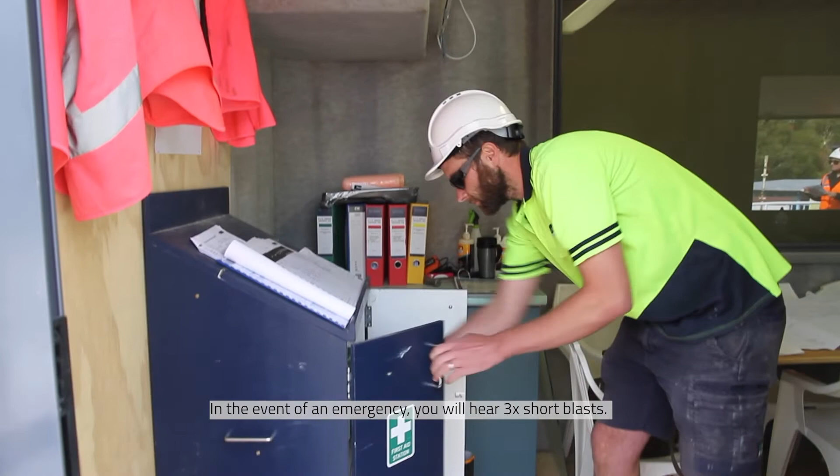In the event of an emergency, you will hear 3 short blasts from an air horn. You must stop what you are doing and make your way to the assembly area. The assembly point is by the playground, in the centre of the pods.

There are multiple safety stations on site, where you will find a first aid kit, fire extinguisher and air horn.

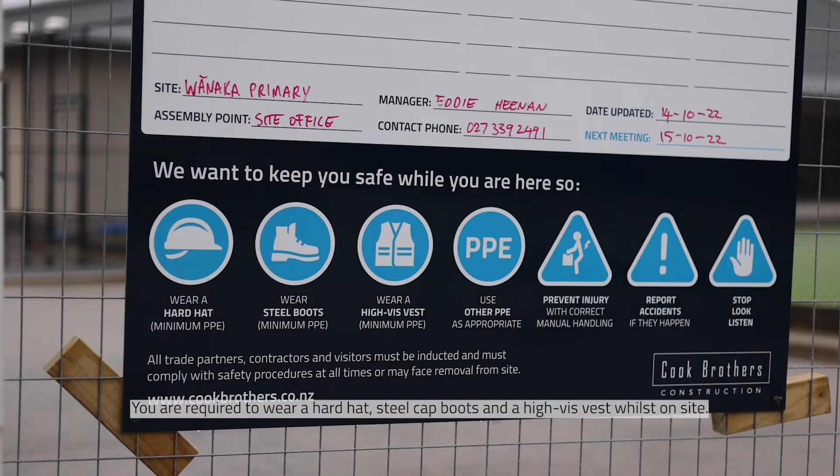You are required to wear a hard hat, steel cap boots and a high-vis vest whilst on site. Please check the hazard board daily for hazards on site. This is a smoke-free site, no smoking on the school grounds.

If you have any further questions, feel free to ask the team on site.

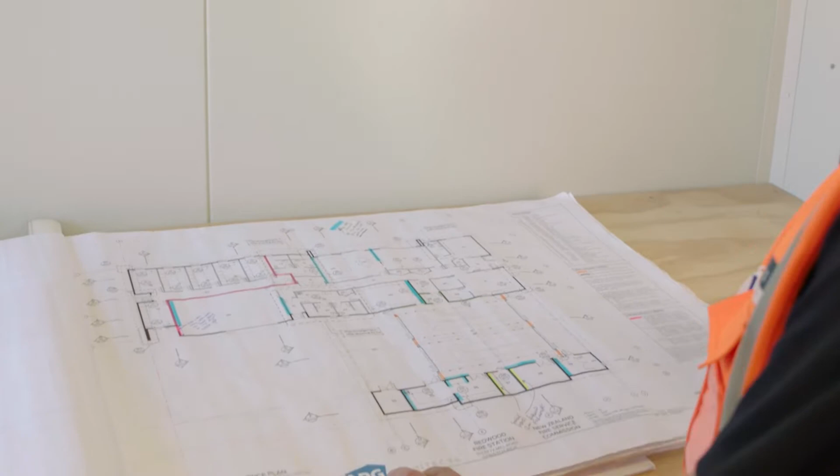Hi, I'm Dave Bulling and I'm the Managing Director of Cook Brothers Construction. Our vision is a team with the desire to take on the world, transform the construction industry and cement us as a national leader. Our culture at Cook Brothers is one of a close-knit team of guys and girls.

We value above and below the line philosophy of ownership, accountability and responsibility, and we leave at the door blame, excuses and denial. We don't have problems, we have opportunities, and we don't have issues, we have challenges.

While you're at Cook Brothers, we want you to be safe, we want you to go home and see your loved ones and do the things that you enjoy during the weekends and after hours. So these are the things that you need to become familiar with, because this is what we live and breathe.

So I want you to have fun, I want you to stay safe, and I really want you to enjoy the projects that we build.

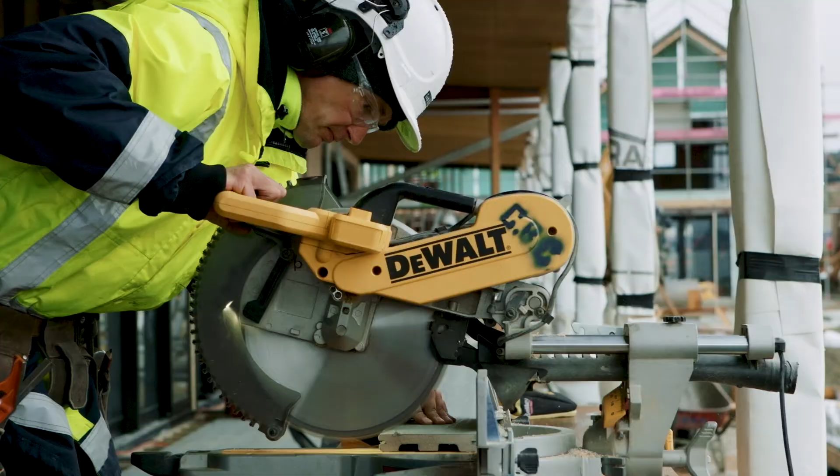Health and safety is about everyone. Cook Brothers Construction encourage team members and trade partners to participate in managing health and safety in the workplace. So in each region, you are supported by a team of health and safety representatives and committees. Their contact information is available in the emergency flip charts.

Some Cook Brothers Construction sites will have an AED defibrillator on site. When one is not located on site, we recommend you download the AED app, which can locate the closest AED location to your work site.

Minimum PPE on site includes hard hats, high-vis shirts and steel cap boots. Singlets are not acceptable PPE on Cook Brothers sites. Additional PPE is task-specific and can include hearing protection, respiratory mask, safety glasses, full face shield, gloves and harness use.

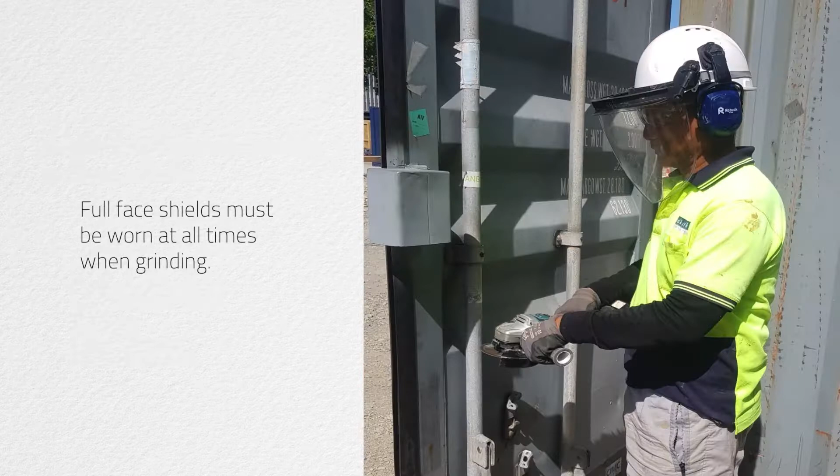Full face shields must be worn at all times when grinding. Cook Brothers are not responsible for the supply of your PPE. Trade partners need to bring their own to site.

All visitors to site must be inducted and wear the provided pink visitors PPE located in the site office. Workers are responsible for wearing PPE appropriately, taking care of the equipment and reporting any defects to your site manager.

All trade partners are required to submit a site-specific safety plan, also known as a SSSP, to Cook Brothers before starting on site. Cook Brothers emphasise that all SSSPs are live documents and must reflect the tasks you are responsible for during the project. Permits are required for hot works.

Please see the Cook Brothers site manager for approval prior to starting.

Notifiable works, as identified by WorkSafe, must be notified at least 24 hours prior to the works commencing and evidence held in the SSSP. All team members coming onto the site must have a site-safe passport or equivalent. Anyone without a site-safe passport must have it completed within 4 weeks of being on site.

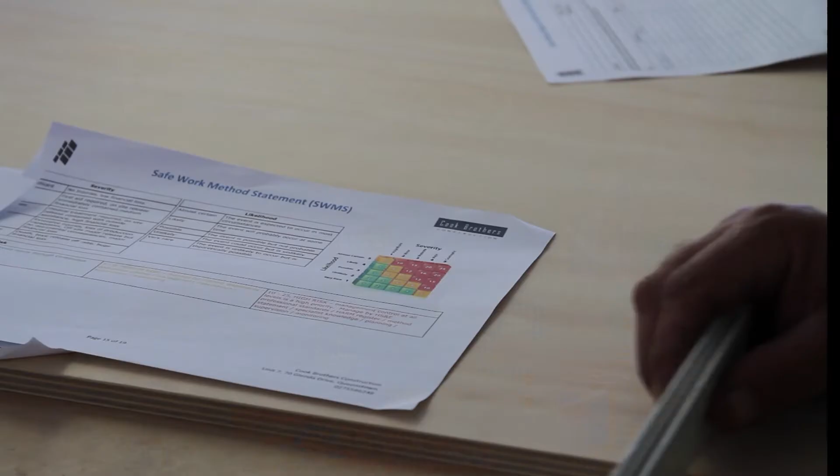Communication and planning is vital for a safe and healthy site. Each worker is required to sign in and out of site each day. The purpose of this tool is not a timekeeping record, but to ensure that all persons are accounted for in the event of an emergency.

Any person not accounted for in an emergency will be treated as missing and may put emergency workers at risk by looking for someone who isn't there.

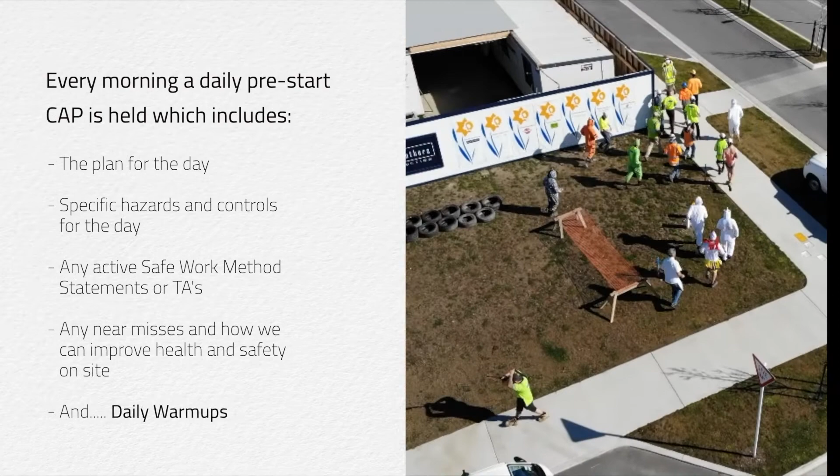Effective planning for critical tasks is essential. This should include a SWMS task-analysis practiced response plan and competency of the team who will be involved. Ensure the planning is conducted with the team members who will be working on or within the vicinity of the task. Weekly toolbox talks are held on site and everyone is required to attend.

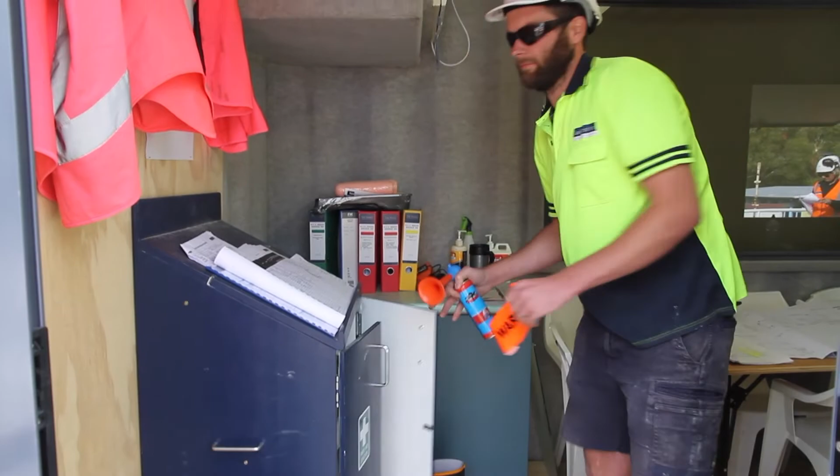In the event of an emergency, all Cook Brothers sites will sound an air horn with 3 sharp blasts to raise the alarm for evacuation.

Your site manager will outline any other emergency alarms specific to your site, as well as the exit routes, the assembly point, first aid stations, fire extinguisher locations, air horn locations, and closest medical centre. An emergency site map will be displayed on site.

Exit routes are required to be kept clear at all times. In the event of an emergency, the site warden can be identified by a red armband. They are responsible for taking the daily sign-in to the assembly point. No workers are to re-enter the site until the all clear is given by the site warden.

In the event of an emergency, check for your own safety first, dial 111, provide assistance if you can, otherwise evacuate the site. Emergency flip cards are located in the site office or the health and safety notice board with this emergency information when needed.

No foul language or inappropriate behaviour will be tolerated on any Cook Brothers sites. Cook Brothers promote a drug and alcohol-free site and have a policy in place. Random drug and alcohol screening does occur on Cook Brothers sites.

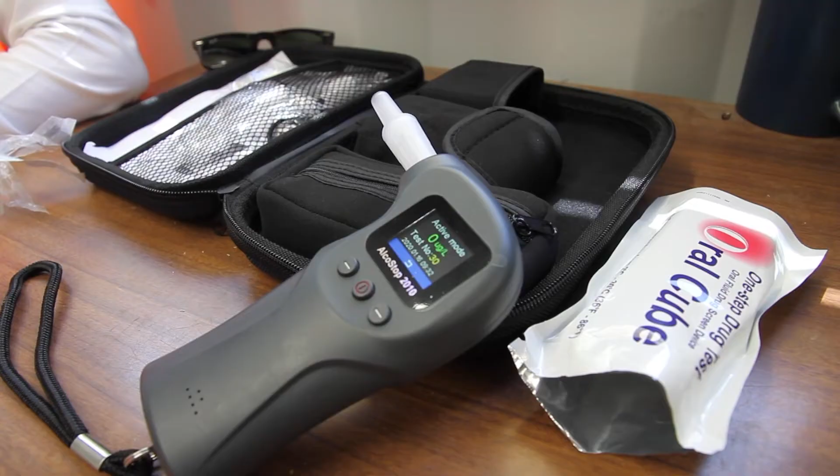If just cause indicates that you may be under the influence of drugs or alcohol, we will ask you to undertake a drug and alcohol test, or we may remove you from site until you can prove otherwise. In the event of a lost time injury, a drug and alcohol swab will be taken for testing.

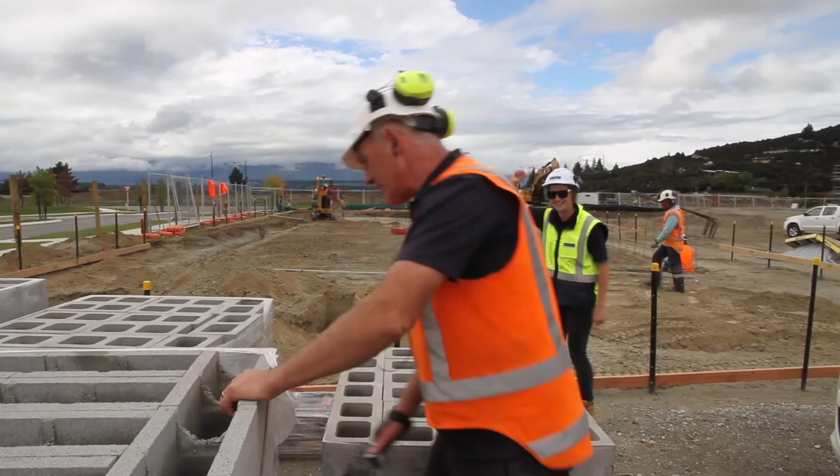The use of audio devices with earpieces is not permitted on Cook Brothers sites. These devices are distractions and create hazards by causing a lack of attention to your surroundings. Radios may be used with the approval of the site manager, but volume must be kept to an acceptable level.

If you are in breach of any health and safety practices on site, a yellow card, red card disciplinary process will be implemented. This can include removal from site.

A clean and tidy site is a safe site. Good housekeeping is required at all times on site, including lunchrooms and wash facilities. All CBC sites are smoke-free. Your site manager will indicate a designated smoking area. Animals are not allowed on site.

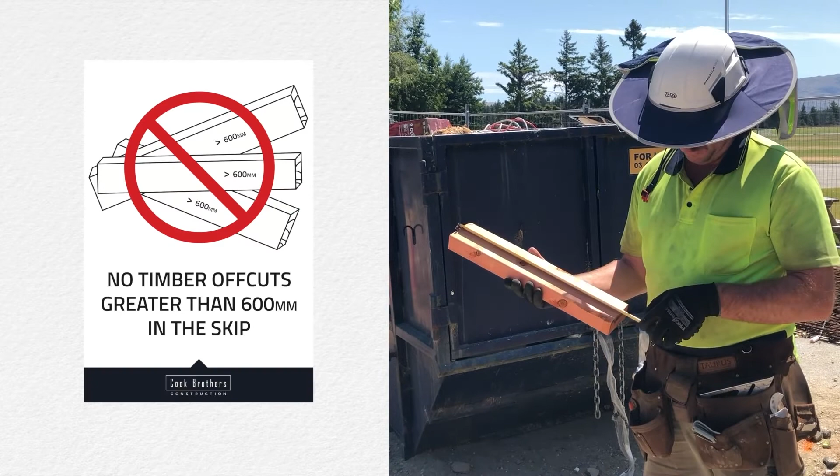All waste and disposal must be covered at all times and disposed of in the correct skips. Our sustainability commitments for waste and material diversion include no timber offcuts greater than 600 to be thrown into the skip. All team members are responsible for reducing waste on site with the use of reusable items instead of disposable.

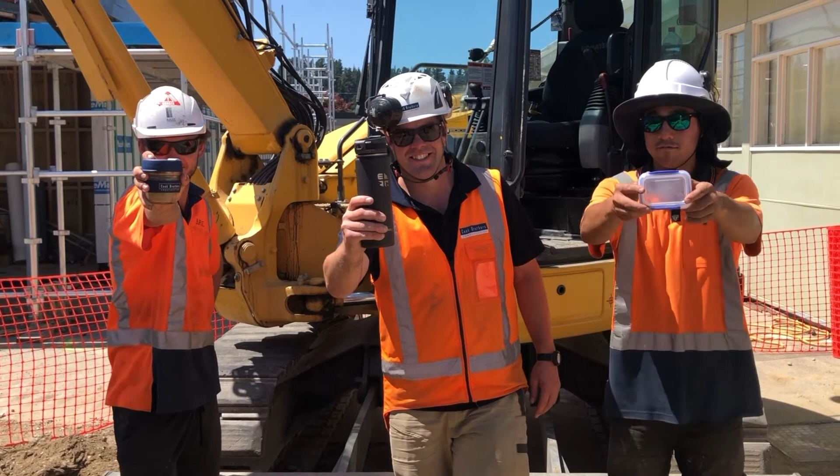This includes keep cups instead of disposable cups, reusable water bottles instead of plastic bottles, and containers instead of food wrappings. Potable water and sunscreen is available on all sites.

Manual handling injuries are a huge contributor to lost time at work. These include back injuries, muscle strain and sprains, and hand and foot injuries.

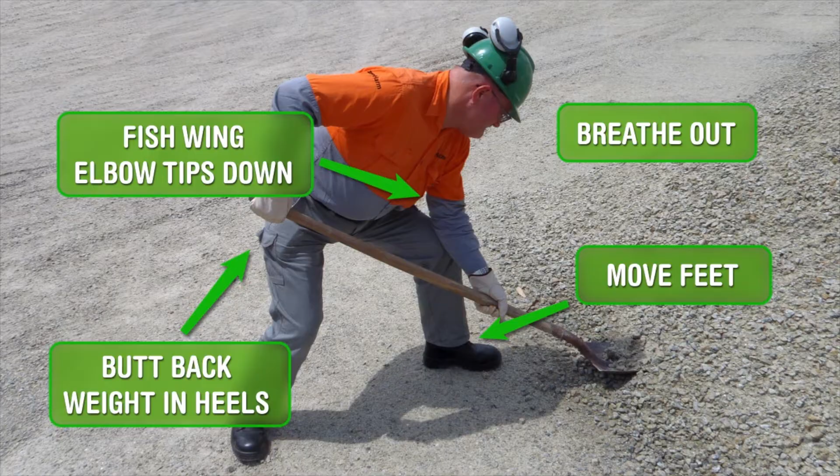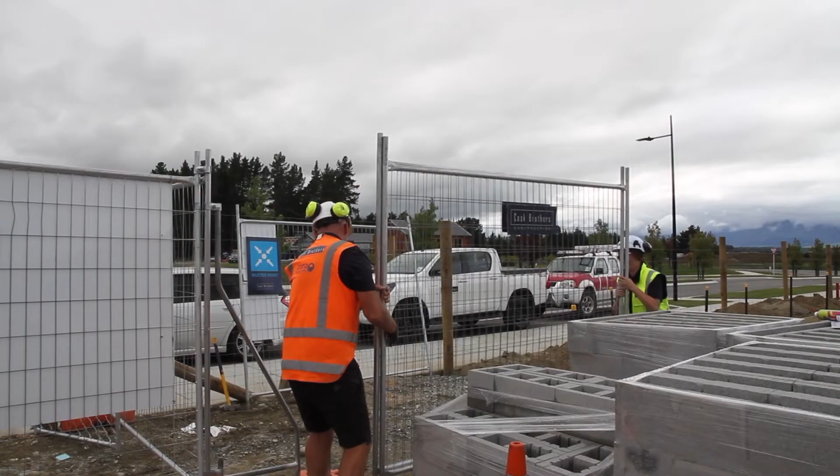Any materials weighing more than 20 kilos must not be lifted by one worker. No worker should attempt to lift any object that they are not comfortable with. When mechanical lifting devices are available on site, these should be used for manual handling tasks. Team lifting must always be conducted for heavy loads that cannot be lifted with mechanical devices.

You must manage the risks caused by hazardous substances in the workplace. Any hazardous substances brought to site must be stored and disposed of correctly. All hazardous substances must be recorded in your SSSP and have a supporting safety data sheet.

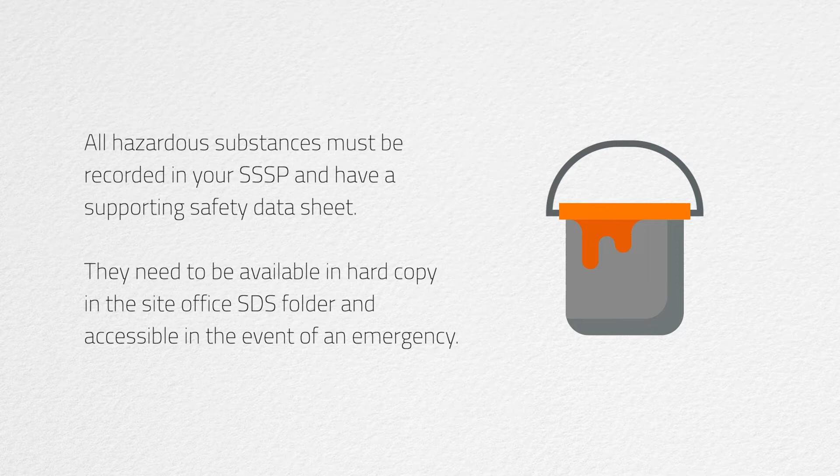They need to be available in hard copy in the site office SDS folder and accessible in the event of an emergency. Under no circumstances shall liquid wastes, such as paints or solvents, be allowed to soak into the ground or be poured down drains. This is hazardous waste and should be disposed of correctly. Spill kits are available on site in the event of a spillage.

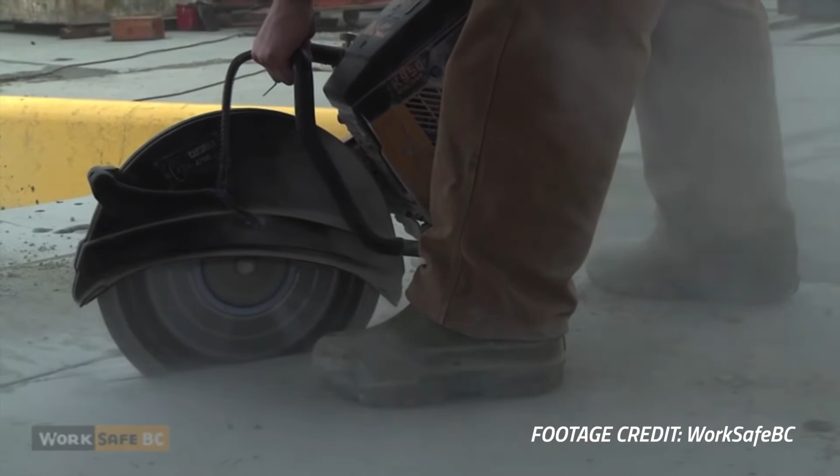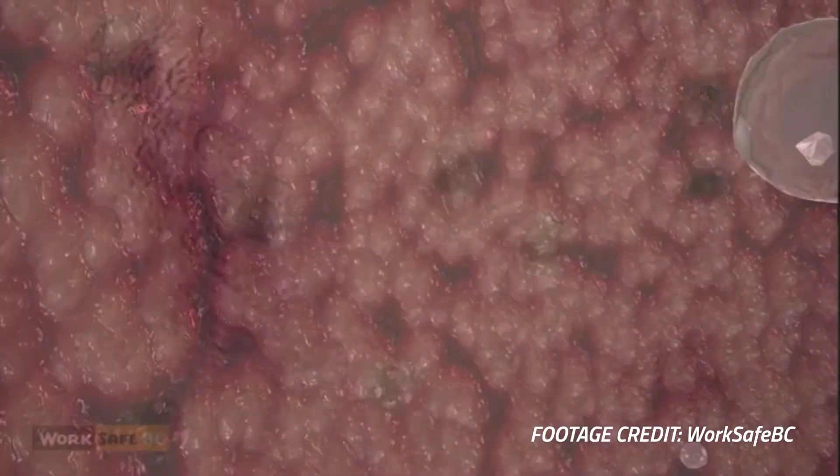Any task undertaken that will create dust must be controlled. Exposure from general construction dust through to silica and asbestos is destructive to your health. Each time you expose yourself to dust, it builds up in your body. Not only does dust affect your health, but those in the surrounding areas if you don't have controls in place.

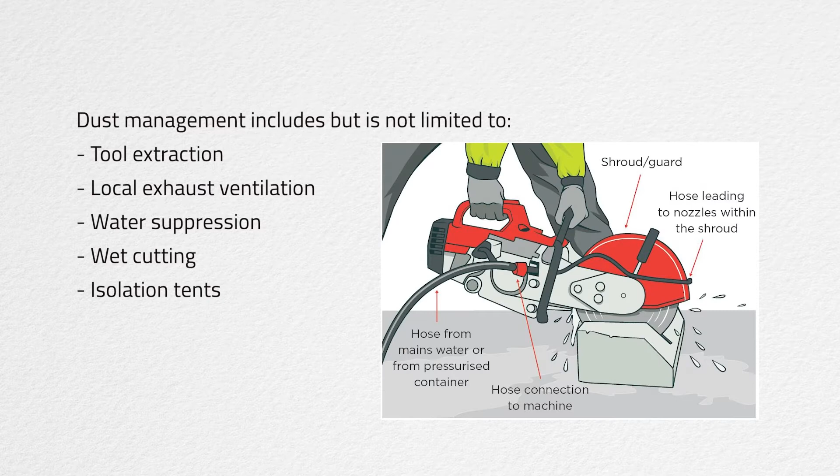Dust management includes, but is not limited to, tool extraction, local exhaust ventilation, water suppression, wet cutting, isolation tents, asbestos reports, and fitted respiratory mask use.

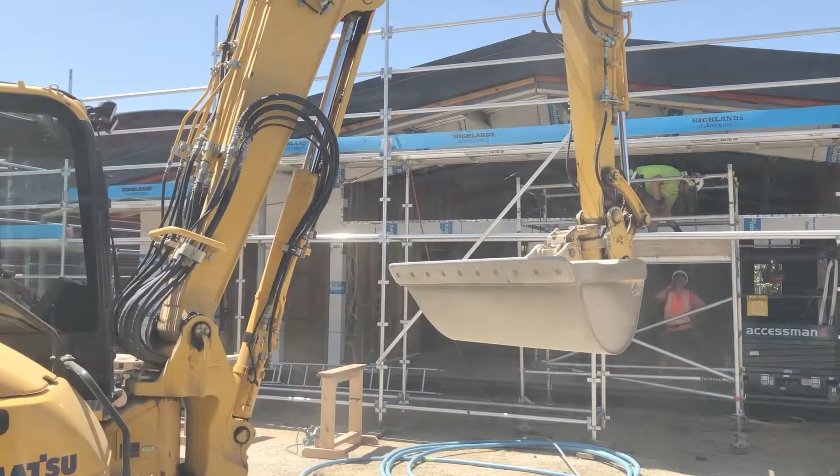Always be aware of moving vehicles and plant. If you cannot see the operator, they cannot see you. Parking is only allowed in designated areas. Reverse park where possible, and always adhere to the speed limits of the site.

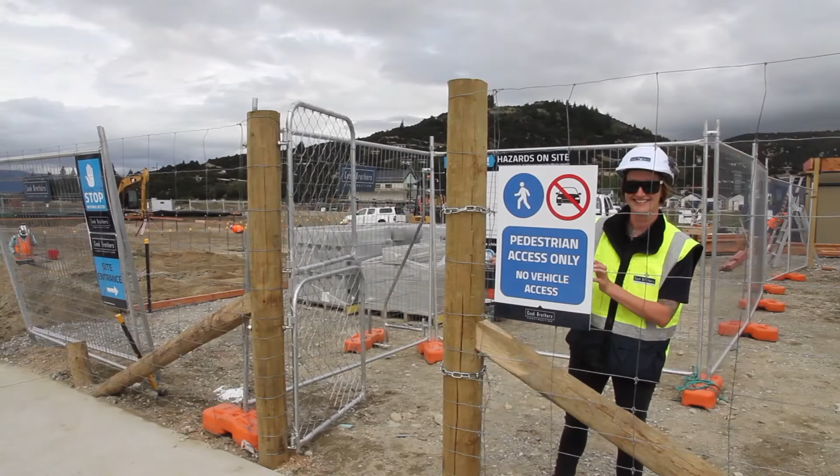Any traffic management plans in place must be adhered to. Pedestrians and vehicles must be kept apart, including on-site and where vehicles enter and exit.

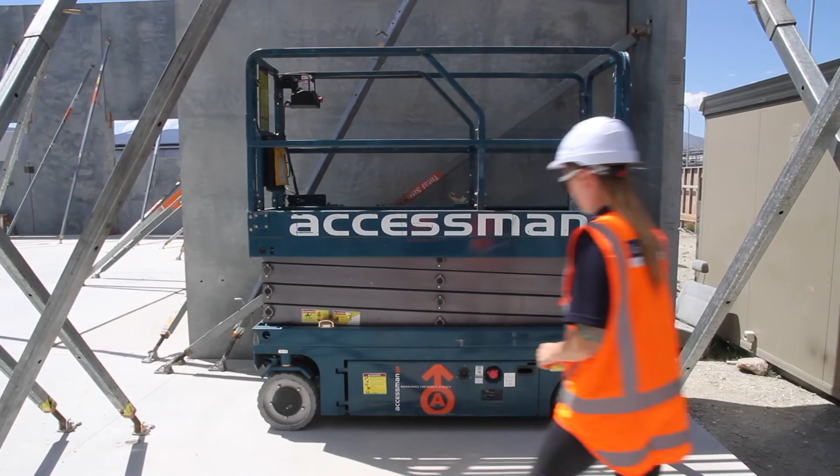Plant and equipment is to be used by trained and competent workers only. Before operating any plant or equipment, ensure that it is fit for purpose. Lifting plans must be developed for craneage, and all slings and chains must be rated and certified.

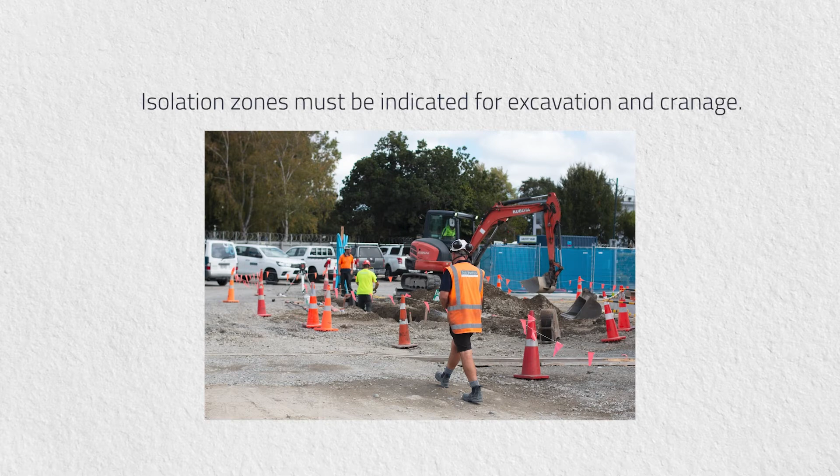Isolation zones must be indicated for excavation and craneage. Equipment is subject to an inspection process that can identify any defects. All angle grinders used on site are required to have a dead man or paddle switch.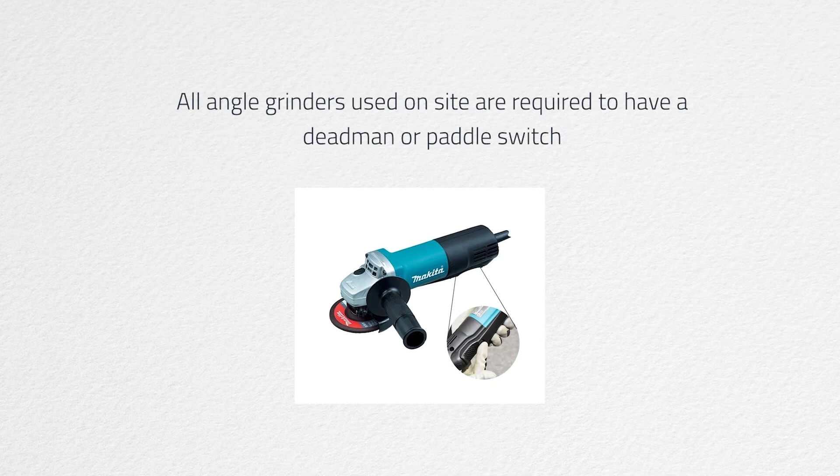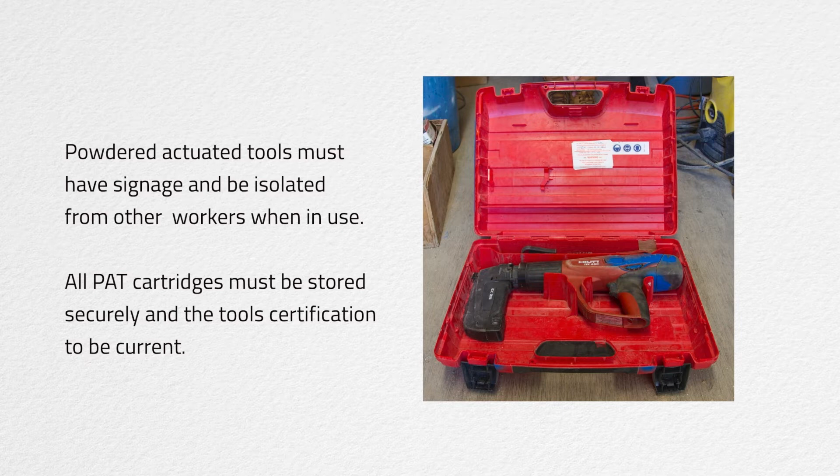Powder actuated tools must have signage and be isolated from other workers when in use. All powder actuated tool cartridges must be stored securely and the tool's certification must be current.

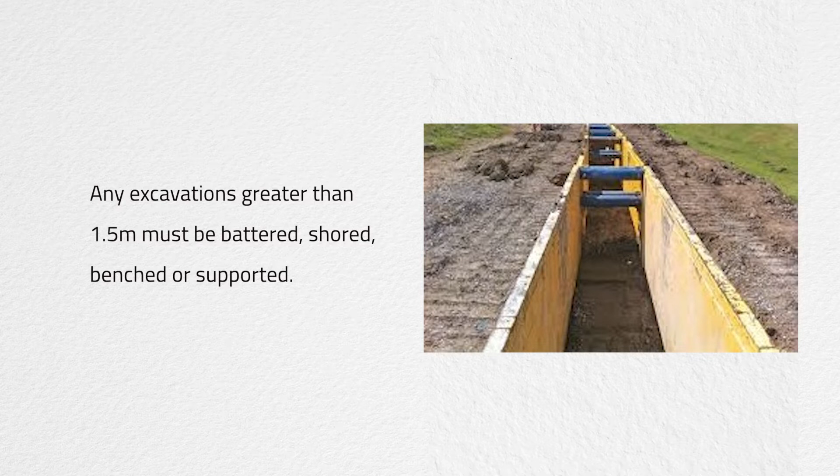Underground services must be identified before any excavation works commence. Any excavations greater than 1.5 metres must be battered, shored, benched or supported. Excavations and trenches greater than 1 metre must be isolated to prevent falls, and access to excavations and trenches greater than 1 metre must be in place.

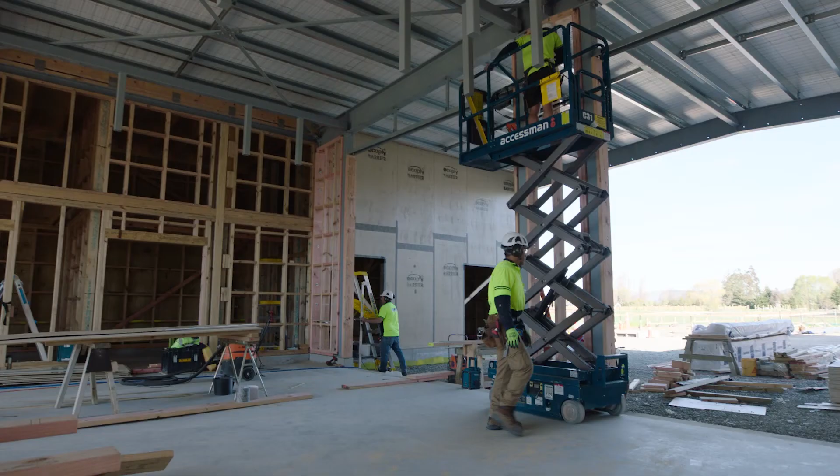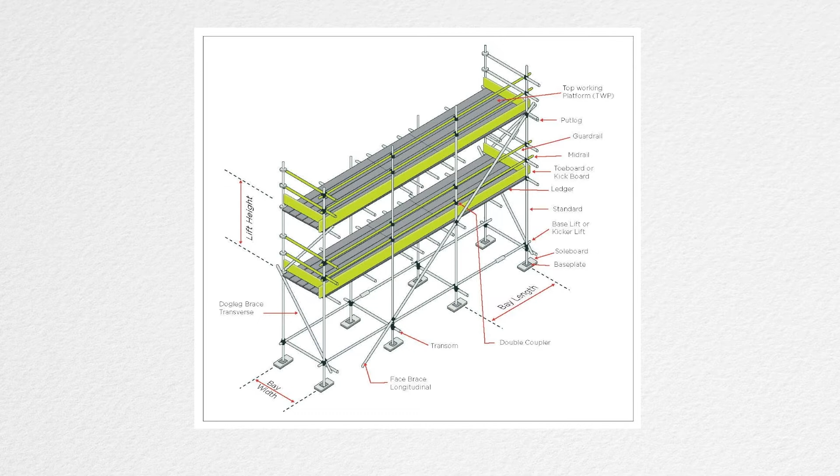Falls from heights can result in permanent disability or death. Daily pre-start checks must be completed before any use of height equipment. All scaffolds must be set up correctly. This means toe kicks, braces, handrails, and all wheels locked off.

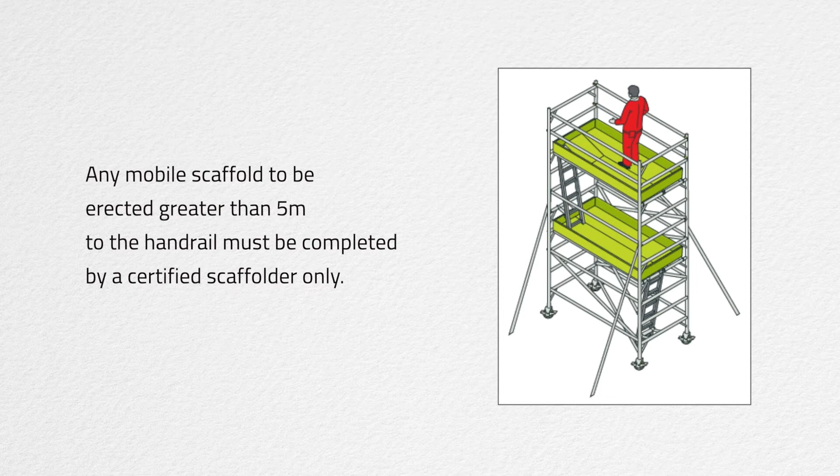Fixed scaffold is not to be altered at any time unless you are trained and competent in scaffold erection, alteration, and dismantling. Any mobile scaffold to be erected greater than 5 metres to the handrail must be completed by a certified scaffolder only. Use of elevated work platforms requires an EWP certification.

A harness and short restraint harness lanyard should be used as indicated. Daily pre-starts must be completed before use. Rescue procedures are to be documented and, where possible, tested.

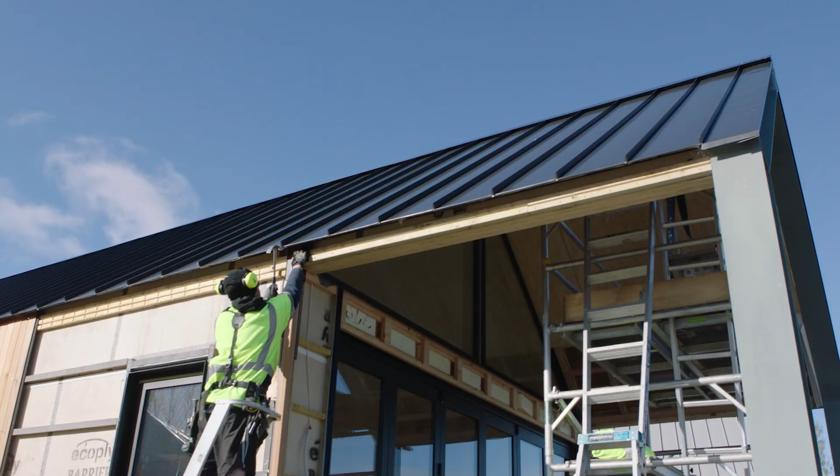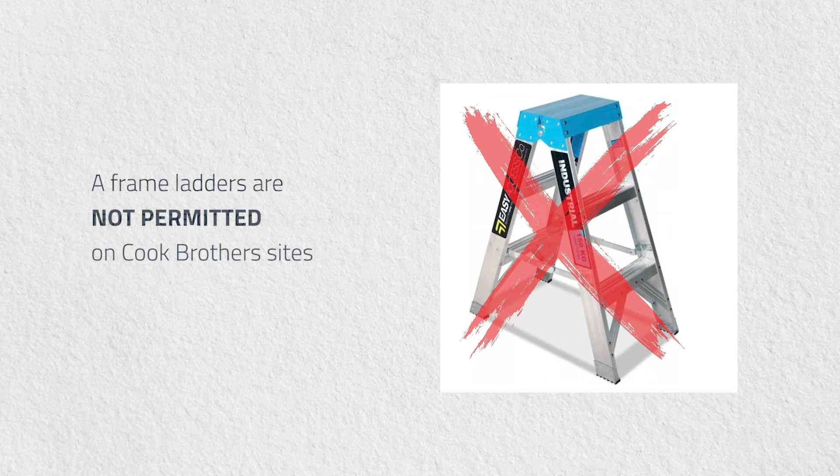Ladders should only be used as a last resort for height access. Consideration for safer alternatives is required first. Safe ladder use includes 3 points of contact at all times and secured at the top and bottom. A-frame ladders are not permitted on Cook Brothers sites, although they may be permitted on the rare occasion for access only. Any work at heights must have isolated drop zones to prevent injury to anyone below.

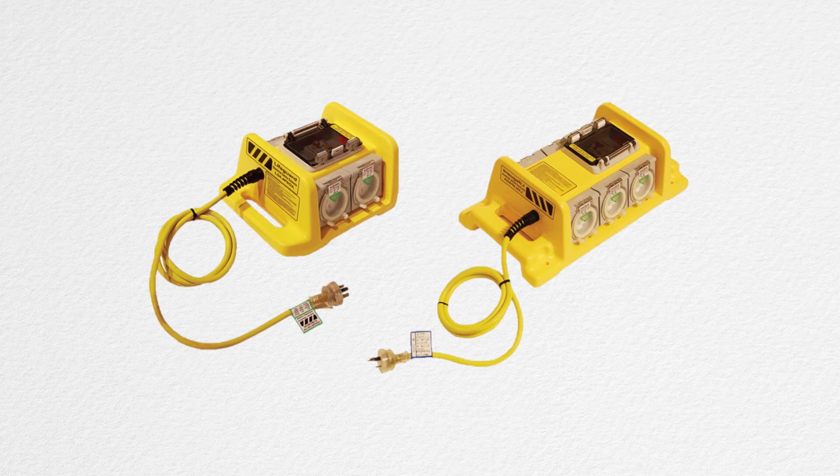All electrical leads and tools are to be checked for any damage. Any damaged electrical leads and tools are to be removed from site, tagged not safe to use, and repaired. Lifeguards and RCDs are to be used for all electrical leads and tools. Multi-plugs must be industrial rated.

All equipment must be tagged and checked every 3 months. All electrical leads are to be clear of water, walkways and traffic access areas unless protected.

Any work involving isolation of electricity must be handed over by the electrician and visually inspected. A lockout tag must be applied. Only certified electricians are to cut cables on a Cook Brothers construction site.

Any notifiable event requires that you give notification to WorkSafe. In these cases, the accident scene is to be isolated and not disturbed until it is released from WorkSafe.

Workers are required to report all hazards, near misses and incidents, irrespective of how trivial they may seem at the time. All incident reports must be made to the site manager immediately. Accident reporting is necessary to ensure that a proper investigation is undertaken so lessons can be learned to prevent reoccurrence.

If an injured worker requires medical treatment, then they are to be escorted by a senior team member as a duty of care.

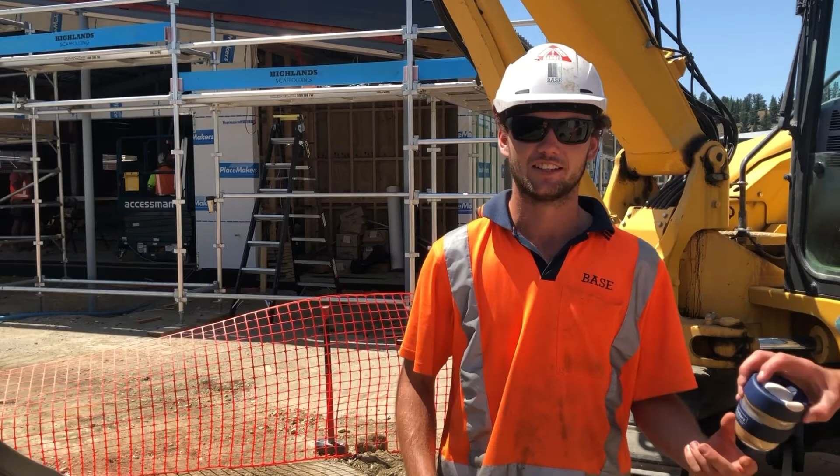At Cook Brothers Construction, we are committed to protecting the health and safety of all people working at or visiting the site. Every person on the Cook Brothers site should feel empowered to stop work when it's unsafe.

If you're unsure about the task you are completing, or the task changes, step back and take 5 to review the process and what safety controls are in place.

Courageous conversation is undertaken by people willing to stand up and protect their team. Join us on our quest to make courageous conversations commonplace on work sites. It only takes one team member who has the courage to stop unsafe work, and that team member could ensure everyone on site goes home to their family safe that night.